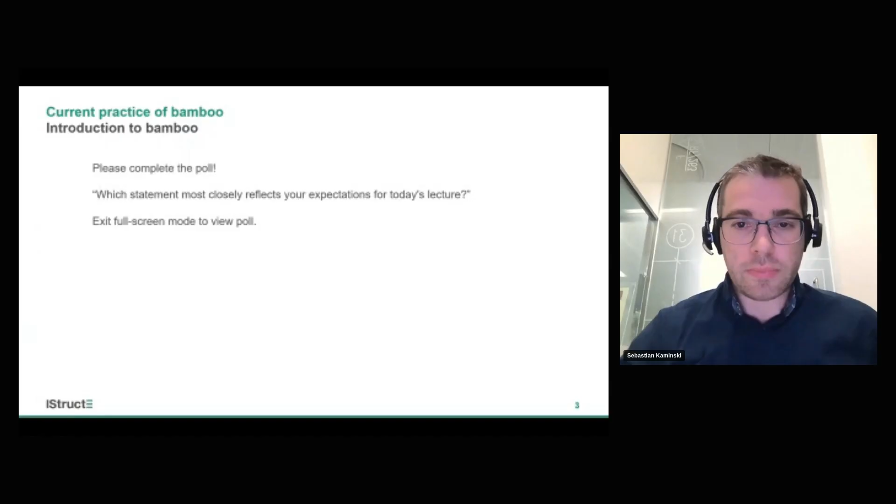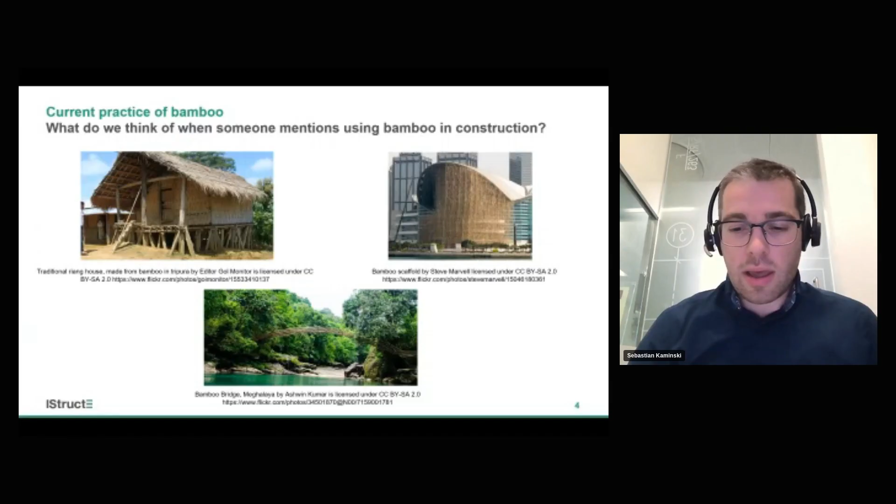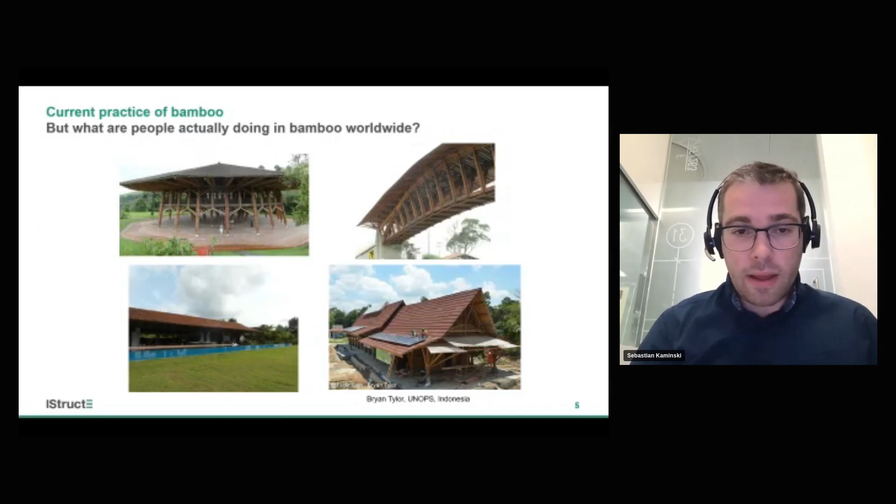So moving on, what do we think of when someone mentions using bamboo for construction? We probably think of something like affordable housing, maybe scaffolding, maybe an informal bridge, but generally we'll think of something that's quite low cost, quite temporary. But actually, what can we do with bamboo? Well, bamboo in the round, we can do quite a lot. There's been a lot of experience over the past, especially I'd say 25 to 30 years, a bit of a boom in using bamboo in the round, which is its unprocessed form, for a variety of different buildings. This is just an example of the sort of building you can build with large diameter bamboo. We've got pavilions which are 2-3 stories high, pedestrian bridges, community centers, luxury housing, and also affordable housing, which I'll talk about in a bit. So there's quite a lot of potential for bamboo in the round in construction.

So I'm going to give a quick introduction to using bamboo. If you are more interested in finding out about bamboo, state of the art, and how to design with bamboo, David and I do an Institution of Structural Engineers course which we run every year, so you're welcome to sign up to that. Bamboo itself is actually a giant grass, it's not a tree.

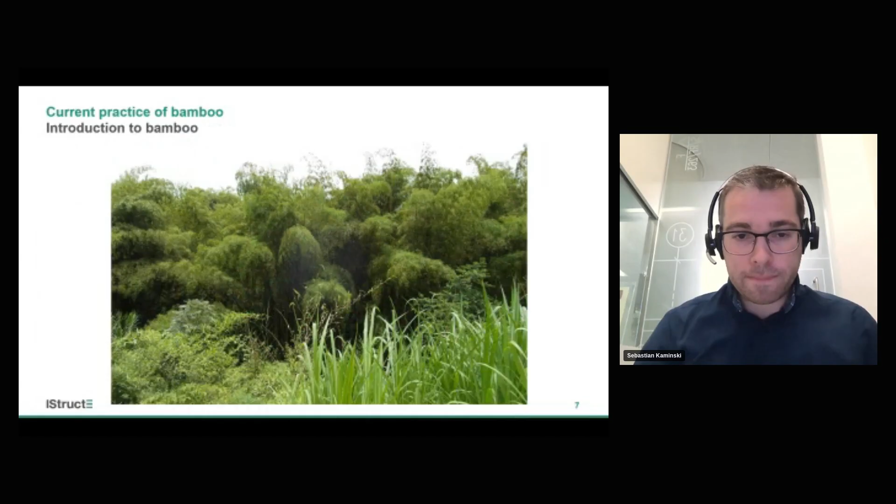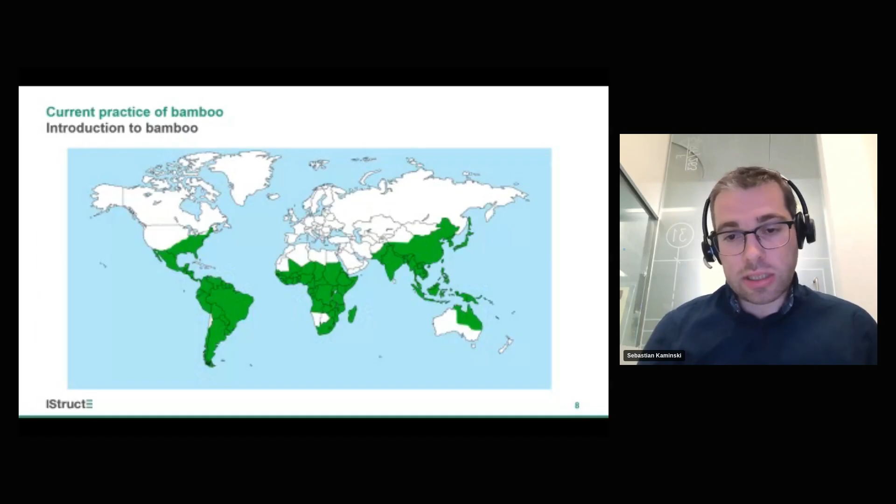This is a bamboo forest in Colombia. This is roughly where bamboo grows natively - most of South America, Central America, and the southern part of North America, a large portion of Africa, and South and Southeast Asia, extending all the way to Australia. So it grows natively in a large portion of the world.

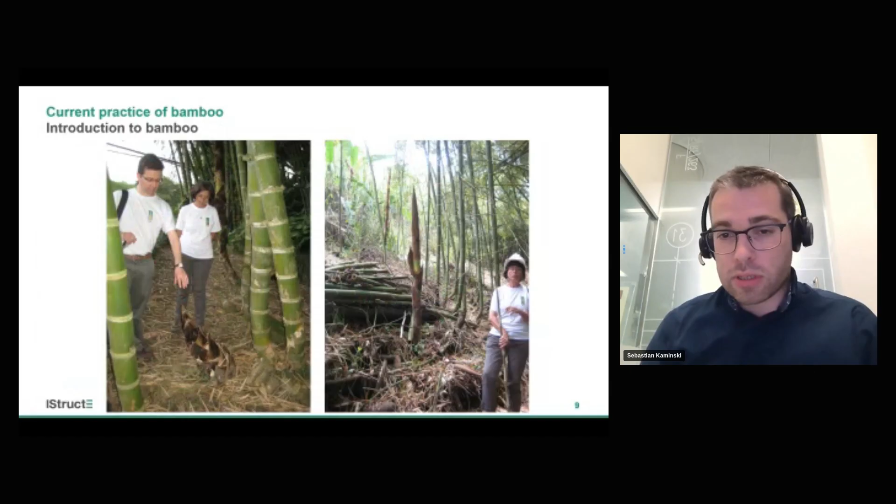Bamboo doesn't change diameter over its life. When it leaves the ground, that's its final diameter, and it goes through cell division between the nodes. On the left-hand side you can see David pointing at a culm just leaving the ground, and it grows very, very fast - within about 4 to 6 weeks that's what you can see on the right-hand side. It grows incredibly fast; within about 6 months it's full height, and then it starts to create branches, and it's mature after around 3 years, and after around 5 years it starts to degrade. So the window to harvest is between 3 to 5 years, and you can compare that with timber, where timber typically needs at least 40, 50, 60 years before it's able to be harvested. So bamboo grows incredibly fast, and from that point of view it's a very sustainable material.

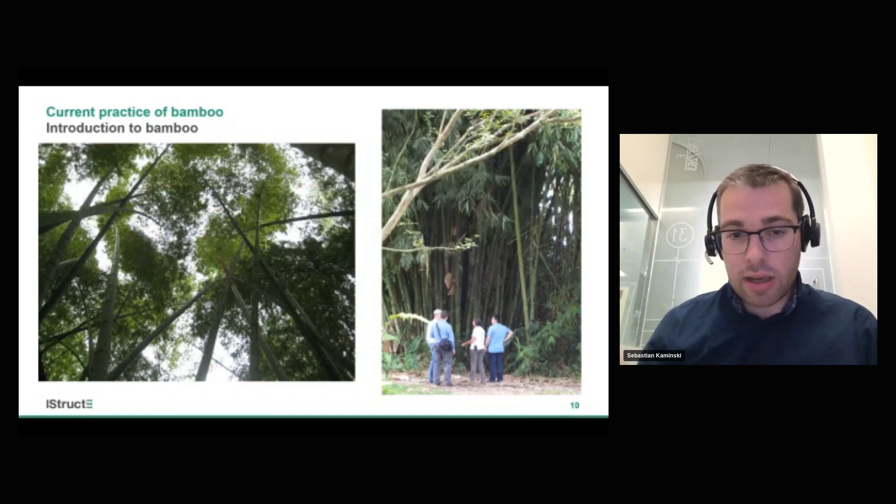A single stalk of bamboo is called a culm, and when they grow together, that's called a clump. So you might hear us referring to those two terms.

There are lots of different types of bamboo. They range in diameter from 10 millimeters all the way up to 200 millimeters. Some species are actually solid, but the majority are hollow. On the right-hand side, you can see bamboo there.

Bamboo has nodal diaphragms, which you can see in the image as this line across the culm, and that's a solid portion of fiber. In between that, it's typically hollow. So you've got the nodal diaphragm and the internode, which is the space between those nodal diaphragms.

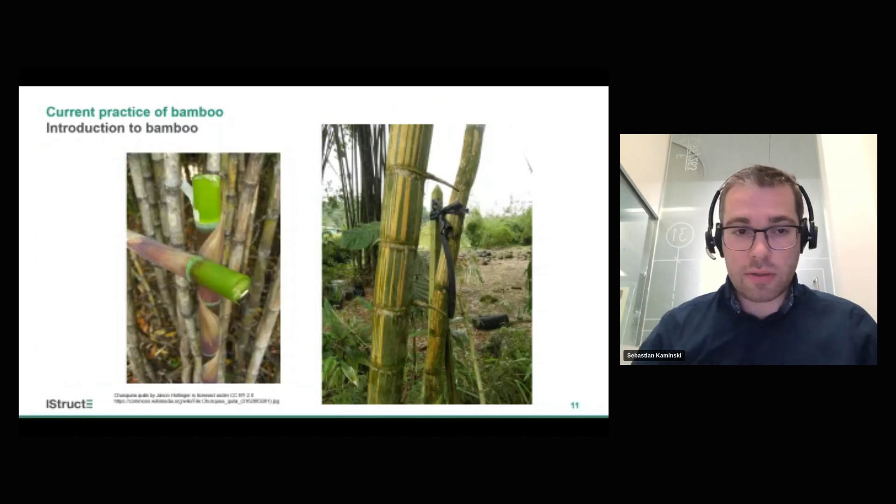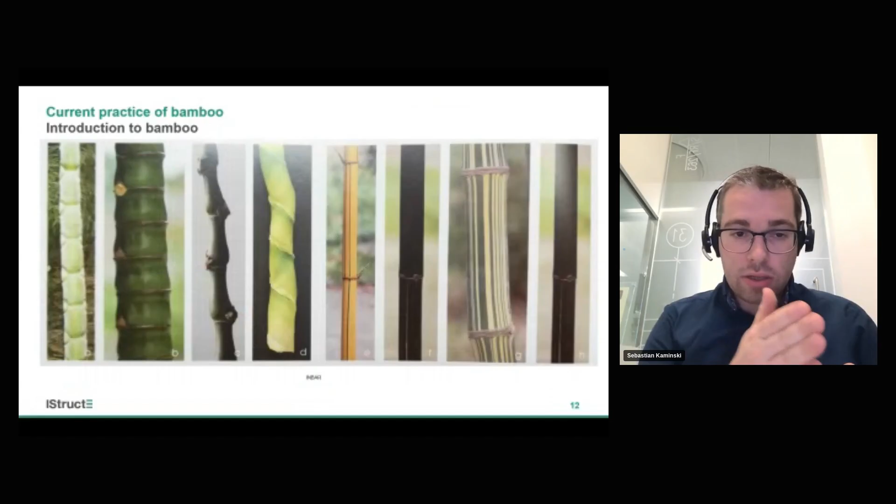There are over 1,600 different species of bamboo and counting. We're still discovering new species every year, and they range in color and shape. Some are straighter than others, some have nodes a lot closer together. But there are typically only about 10 to 15 species that we use structurally for construction because they're large diameter and tend to be straighter, so they're a little bit easier to use.

A brief summary of bamboo properties: the dry density is around 650 to 700 kilograms per meter cubed on average. Culm heights can vary from 3 meters up to 30 or sometimes 50 meters. Nodal spacing between the diaphragms is anywhere from 200 mil to 500 mil, and the diameter can be as small as 20 mil up to 200. As a general rule, the wall thickness for the solid species of bamboo is 10% of the external diameter.

Why do we consider bamboo very sustainable and low carbon? Firstly, it grows very fast to maturity, which makes it particularly useful if we're trying to fight climate change now. If we plant something today, we can harvest it in a very short time period.

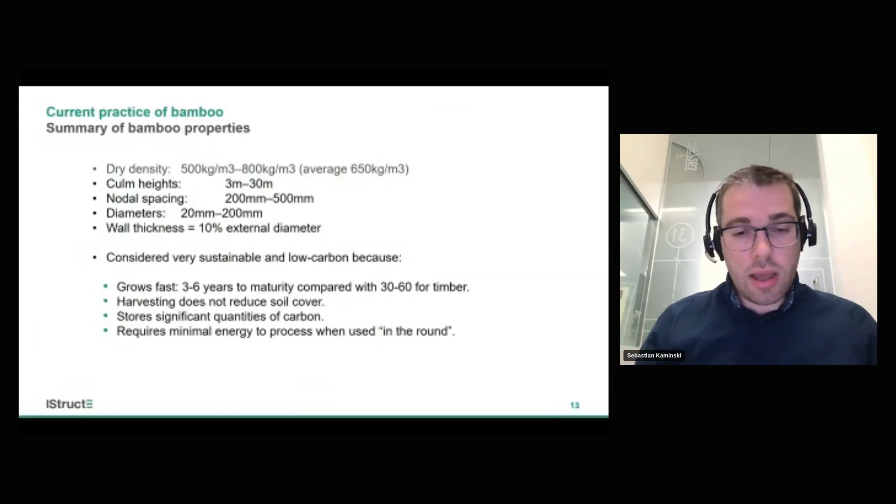Unfortunately, compared with a timber forest, if we plant one now, it'll take a lot longer to harvest. In addition, because bamboo is a grass, harvesting it doesn't kill the plant. Unlike a tree, where harvesting a single tree kills the plant, bamboo's plant survives underground and keeps producing new culms. Therefore, the soil cover isn't completely reduced and you don't get that erosion.

Bamboo stores significant quantities of carbon in the culm itself, but also in the plant underneath the ground. And it requires minimum energy to process when used in the round. So there are a lot of advantages of bamboo from that perspective.

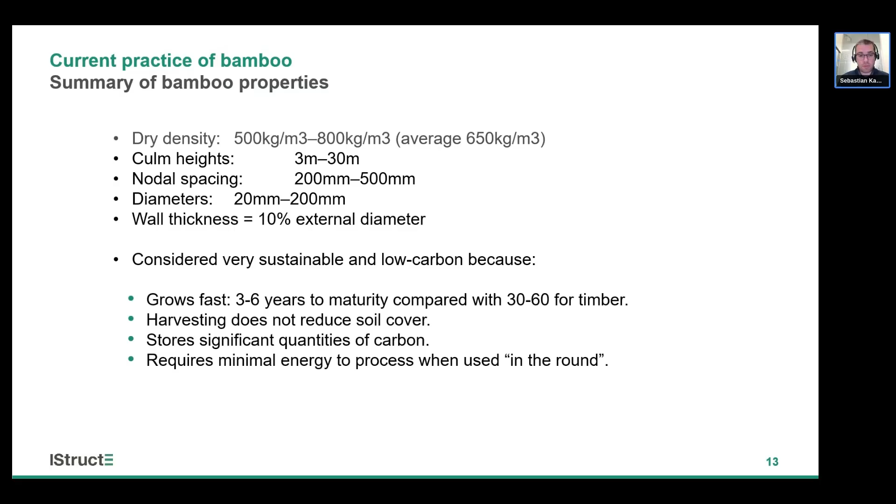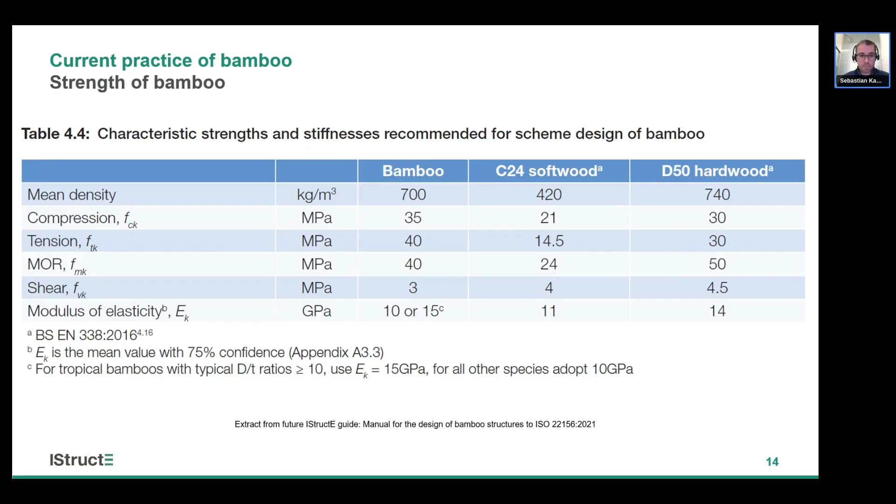It's cooked probably only for a few minutes, but most of that wall is completely gone, unfortunately. So you really have to protect bamboo from fire with gypsum plasterboard, gypsum plaster, or cement-based plaster. We've done tests showing that a cement-based or gypsum-based plasterboard can quite quickly give at least a 30-minute fire rating. But unfortunately, you can't use bamboo completely exposed to fire without any protection.

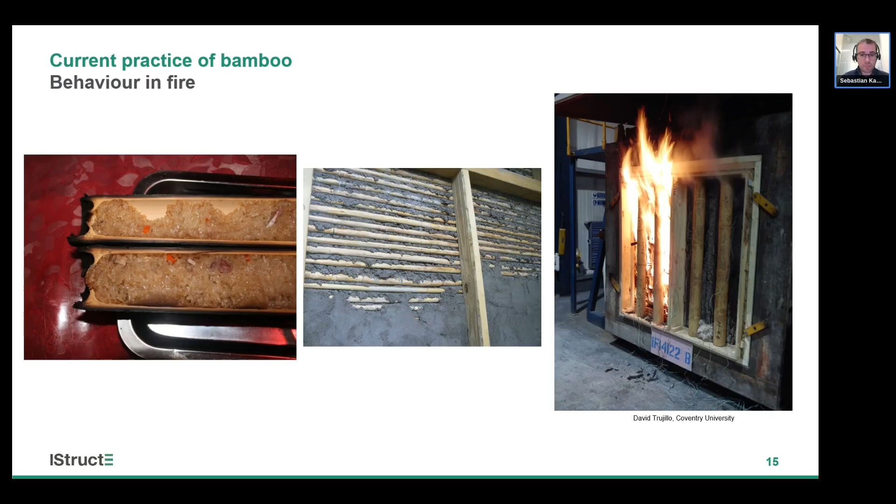Behavior in earthquakes. People often say bamboo is flexible and therefore behaves well in earthquakes, and that's a bit of a misconception. Bamboo itself, if you try and bend it, it will snap. So bamboo itself is generally quite brittle in most failure modes.

If you take a piece of steel on the other hand, and you bend it, most types of steel will tend to be quite ductile. You can bend it backwards and forwards several times. The steel heats up, and you've converted the dynamic energy into heat, but you've got a lot of ductility.

And bamboo buildings - so bamboo by itself as a material is generally quite brittle. Now, bamboo buildings can behave well in earthquakes, especially traditional ones. Firstly, primarily because they're quite light in general. And obviously in an earthquake, the force you need to resist is directly proportional to the mass of a building. So lighter building means less mass. In addition, we have those connections which can absorb some energy if they're well designed, and traditional buildings are generally quite well tied together.

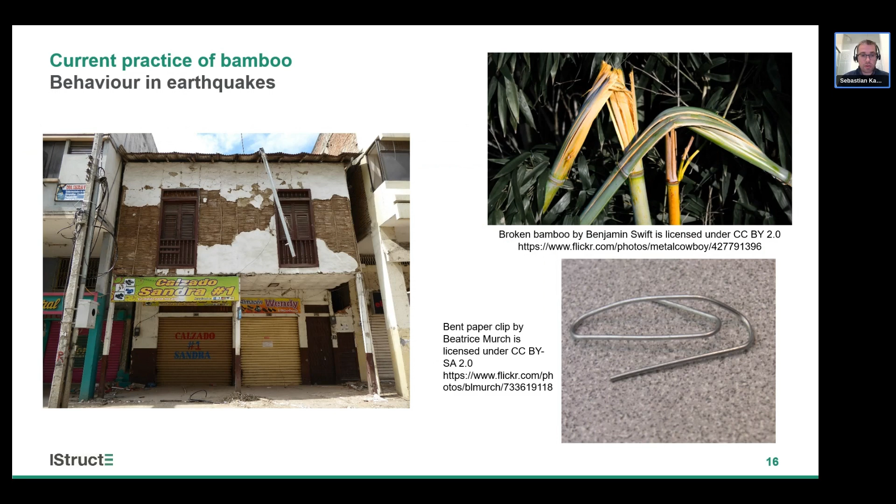Now, modern buildings - again, this idea of flexibility of bamboo is a bit of a misconception. We really need to have good steel connections to be able to absorb energy, exactly as you would approach timber in seismic design. So timber itself, generally most failure modes are also brittle, but it's those steel connections that can absorb energy. So exactly like timber when you're looking at bamboo for seismic design.

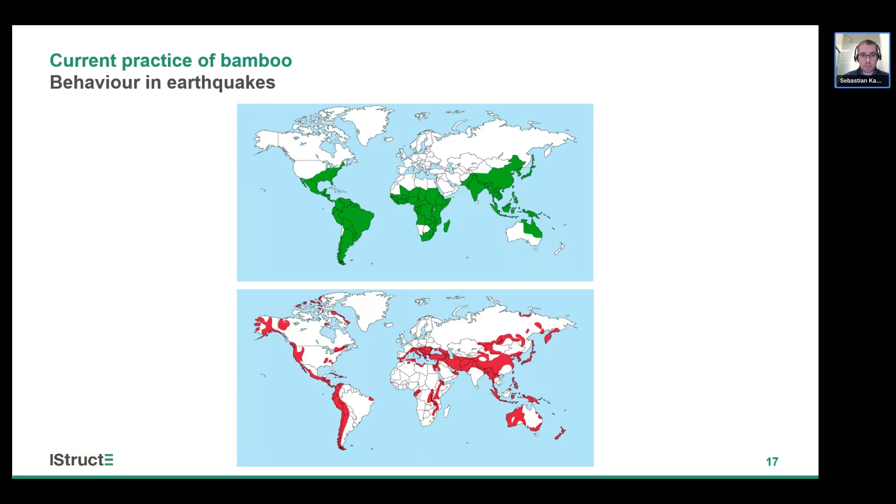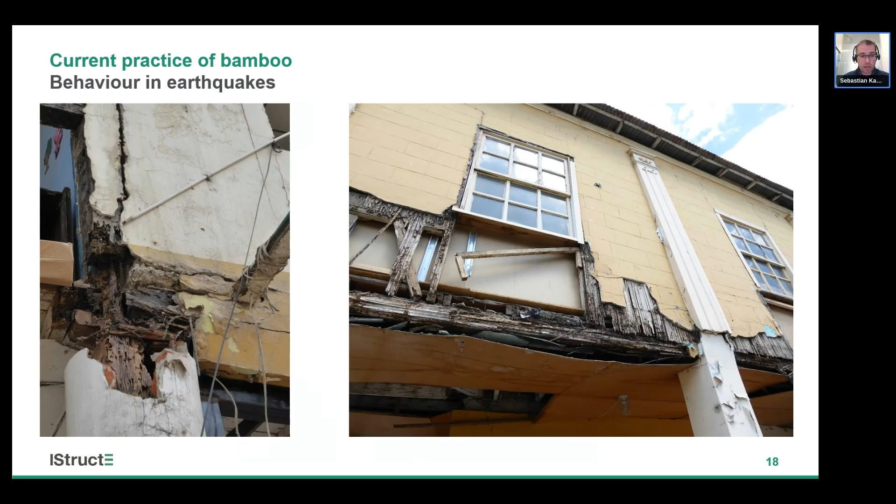But you need to keep bamboo in good condition. When bamboo isn't in good condition, the structure will not behave well in earthquakes, and we've seen this a lot after many recent earthquakes. These are just two photos I took after the Ecuador 2016 earthquake. This structure nearly fell down. Luckily it didn't, but most of the damage was actually due to rot, and that made it a lot weaker in the earthquake.

In wind, bamboo is quite a light material, and in general it forms light structures, and that means for winds it's a bit harder to design for, but it is possible. Base Bahay have done a great job in the Philippines making typhoon-resistant housing that's made of bamboo. The structure is predominantly bamboo, and they just have good connections, and they've tied the structure down to the foundation. So in the same way as you design any other building for typhoons, it is possible to make a modern bamboo building typhoon resistant.

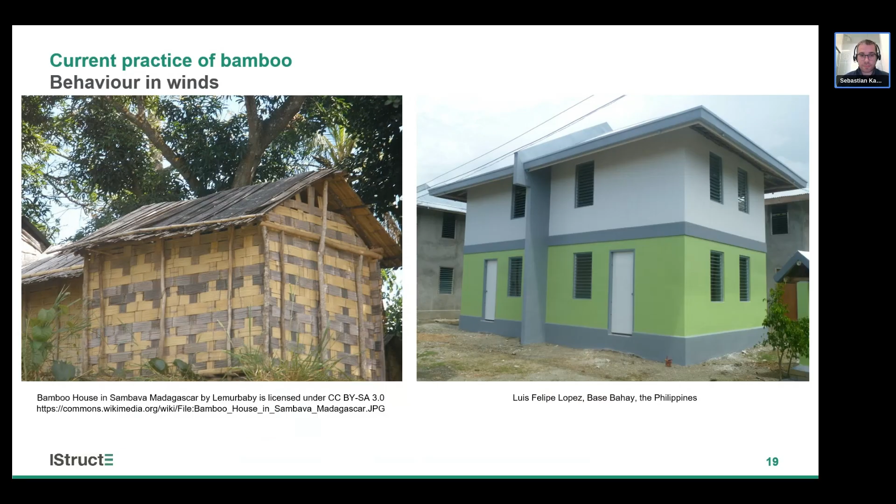In terms of durability, unlike some species of timber, bamboo does not have any naturally occurring chemicals which will help protect against natural attack mechanisms. So unfortunately, it's very vulnerable to beetles, termites, and rot. So for that reason, we have to protect it.

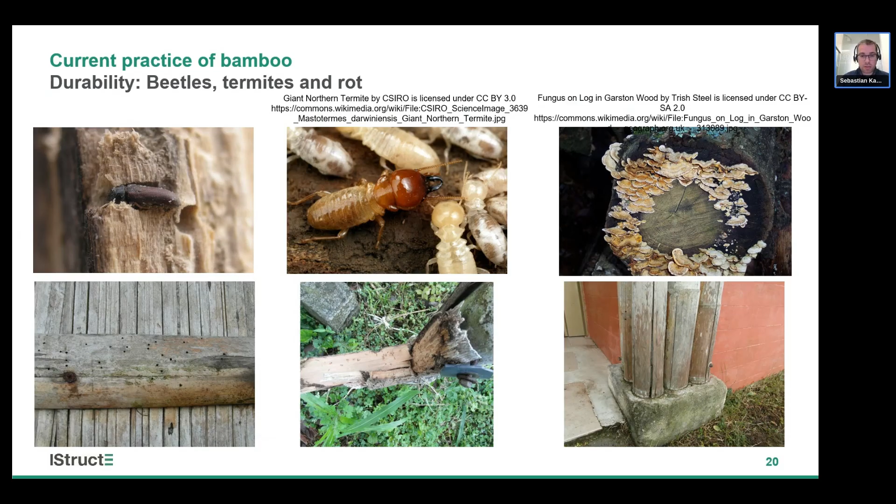And how do we do that? Firstly, we treat bamboo typically with boron, and that protects against beetles and termites very well. Unfortunately, you can't use boron treated bamboo outside because the boron just gets washed away. So we need to also keep it dry. How do we do that? Simple durability by design: you have a good waterproof roof, waterproof walls, you elevate the structure, damp-proof membrane. If you've done that and you've treated the bamboo, the structure should last 50 years plus very easily.

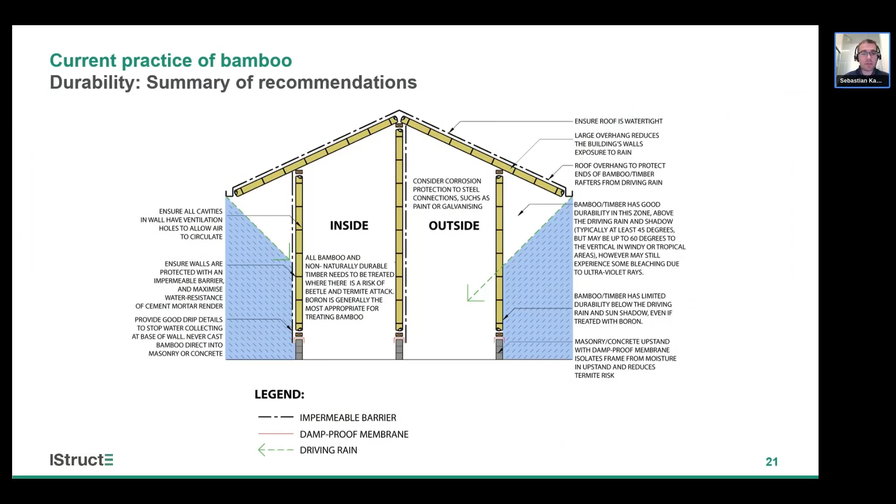So we know how to make durable bamboo buildings right now. This is a summary of standards around the world that use bamboo. The first one was in 2000, but the first detailed standard that contained a lot of design methods was in 2010, and that was published in Colombia.

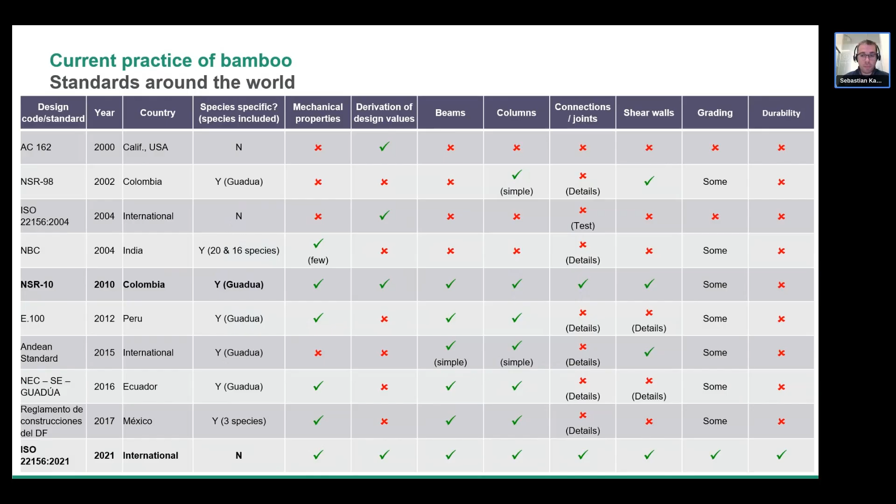And the most recent one in 2021, which David and I worked on, is ISO 22156, and this remains the state of the art. It contains the most recent design guidance and includes everything you need to do good structural design of bamboo in the round right now. So if you want to design with bamboo today, these are the three standards we recommend using: 22156 for structural design, 22157 for determination of physical and mechanical properties, and 19624 for grading. There's still a lot of work that needs to be done in this space, but this is a good start - at least one can do quite challenging structures now following these codes.

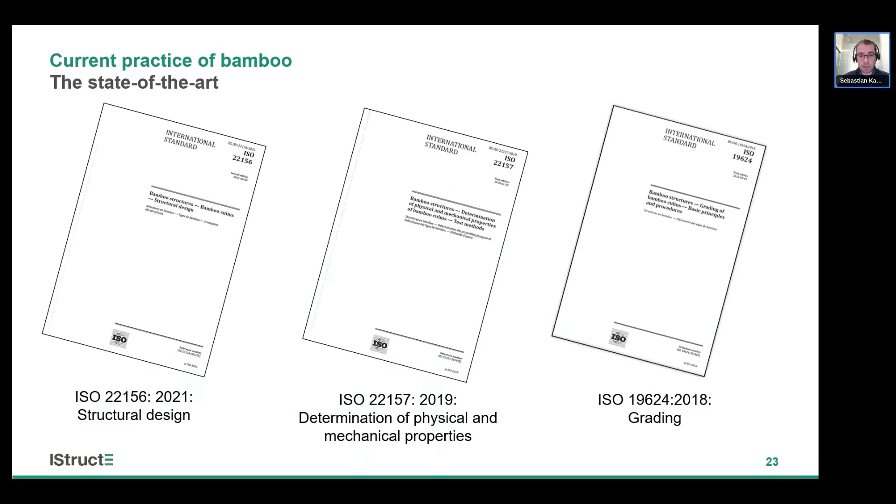Where in a structure is whole-culm bamboo most appropriate? Bamboo itself is quite strong, but the connections are the weak point, where you get crushing or splitting. Because of that, it's best to use bamboo for elements in compression, where connections are simplest, and since bamboo isn't very stiff, it's best used in bending with low dead and live loads, where deflection is less important. That makes it most appropriate for roofs, purlins and rafters, columns, and secondary beams and floor joists. Bamboo should be fully protected from water, sun, and rain, so it should only be used internally or externally when well protected by adequate roof overhangs.

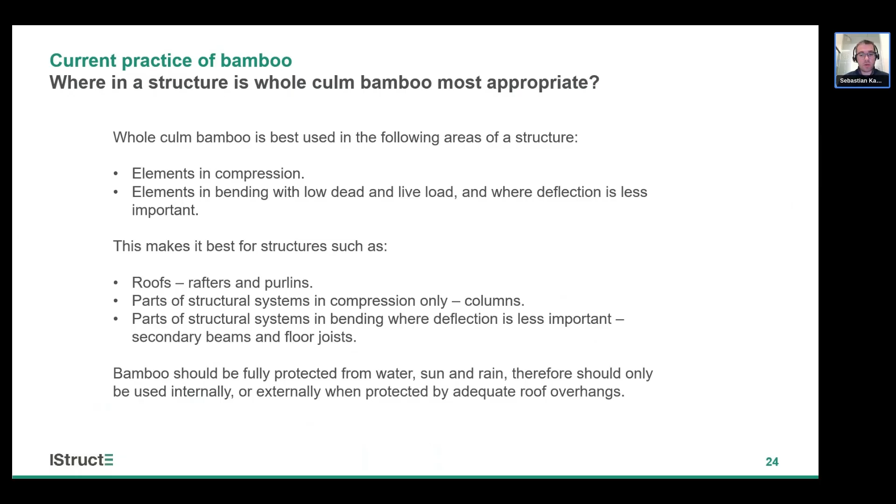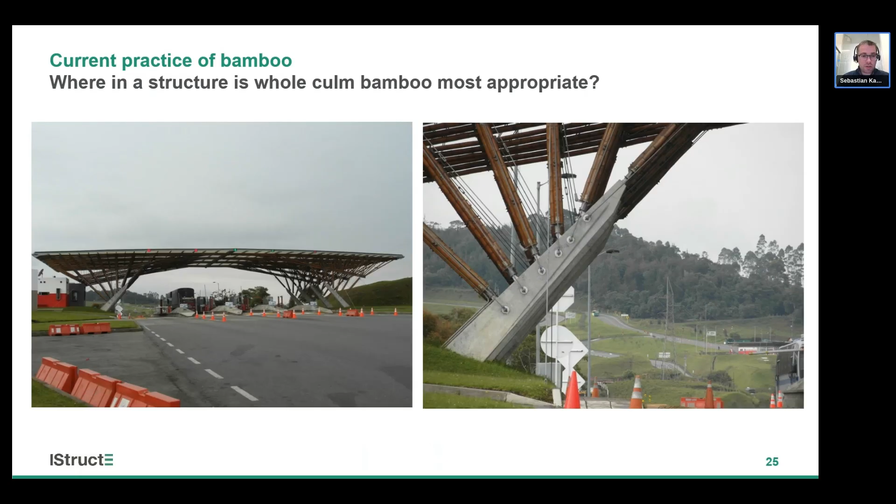This is one of my favorite images. This is a toll booth in Colombia. The designer has used bamboo in a very clever way, mixing it intentionally with different materials. They used concrete for the foundation that touches the ground and is most exposed to driving rain, bamboo predominantly in compression, and steel cables for the areas in tension — intelligently using three different materials where they are strongest.

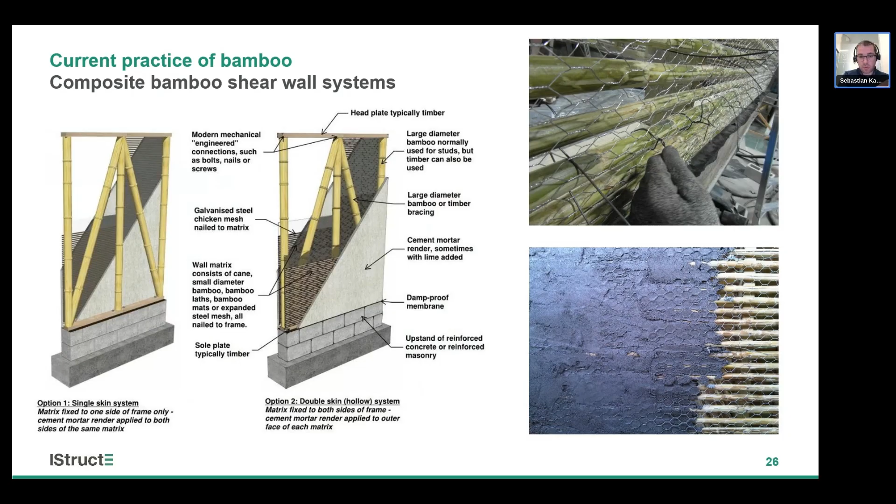In terms of systems, there's one specific system we think has a lot of potential: the composite bamboo shear wall system. This uses a timber or bamboo frame clad in a matrix of bamboo and plastered in cement mortar with chicken mesh reinforcement. That system has proven to be quite earthquake and wind resistant, and it's fully code compliant with a design life of 50 years plus. It's based on the vernacular wattle and daub system from Latin America called Bahareque, but improved using local engineering.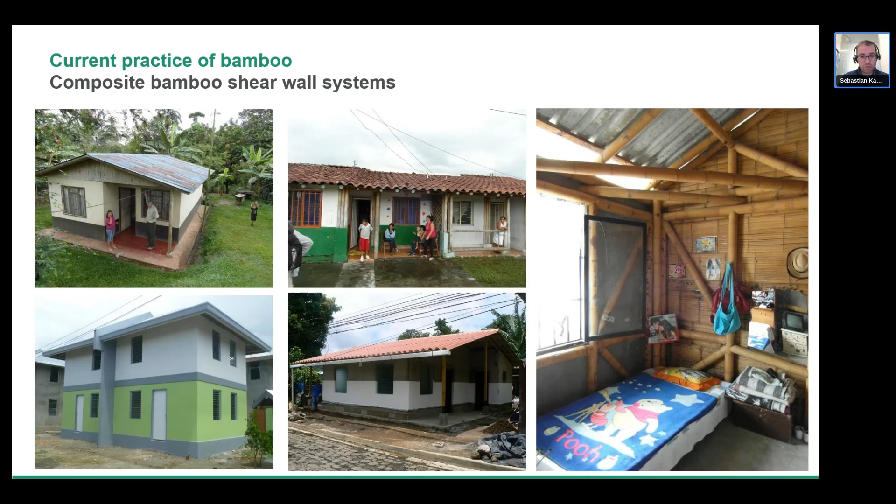These are some examples from around the world, anything from single story to two-story terraced housing in various countries. Over 10,000 modern composite bamboo shear wall houses have been built since 1980, most in Colombia, Costa Rica, India, Nepal, Philippines, and Ecuador, but also smaller numbers in El Salvador, Mexico, Haiti, and other countries. This system has a lot of potential, and if you're working in affordable housing, we'd encourage you to look at this.

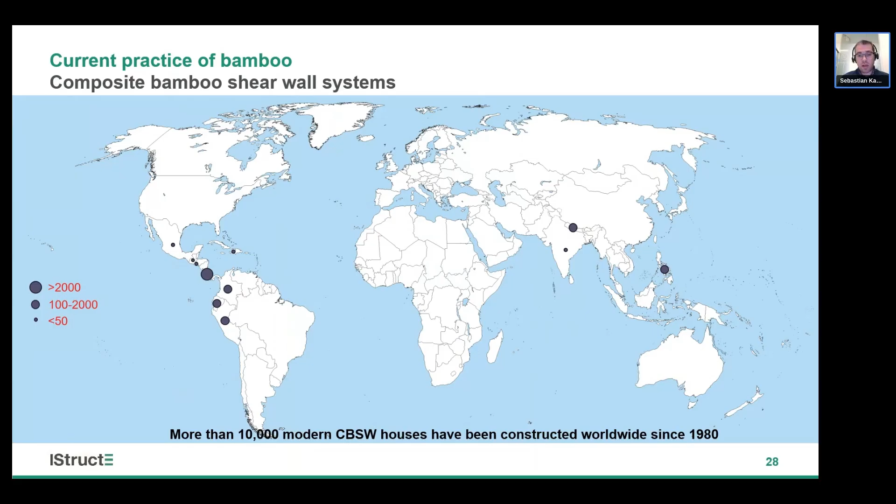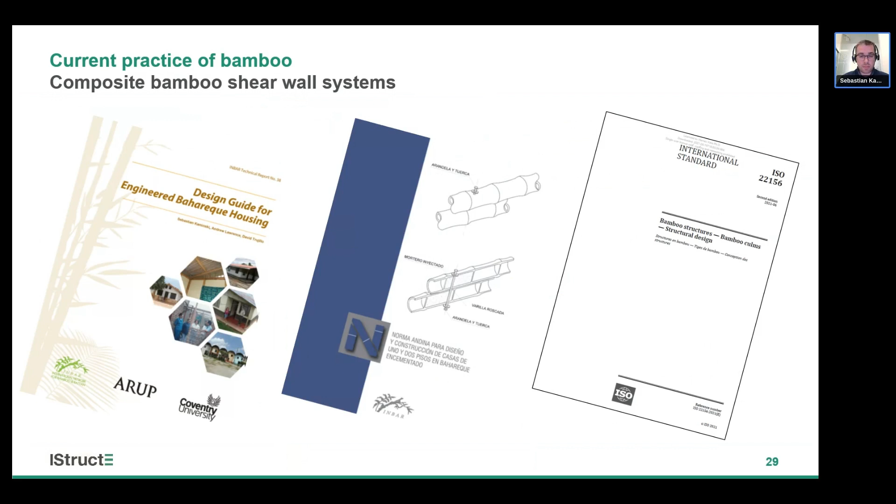We've published a number of design guides on this in English, Spanish, and French, and it's also incorporated into ISO 22156. Before I pass on to David, I wanted to finish off on the current level of knowledge on structural design of whole-culm bamboo. We can design with whole-culm bamboo right now, though it's still relatively in its infancy compared with timber.

For mechanical properties of various species, some, particularly moso, asper, and guadua, are quite well studied, whereas others are much less studied. In general there isn't an enormous variation between species — there's more variation in stiffness and strength, though it's not hugely significant — but we still need more work in that space. There's still enough to do good design; you just might need to do some testing for rarer species.

For element design, there are good design equations for flexure, shear, and compression already in existence. Joint design is another weak area — we've provided some methods in ISO 22156, but more testing is required. Unlike Eurocode, where you can pick up the framework and design from first principles, with bamboo you normally have to do full-scale testing to validate an unusual joint design, unless it's quite simple.

For durability, we know how to make durable bamboo buildings that can last 50 years plus. For fire, we know bamboo doesn't behave well, so it has to be protected. For seismic design of systems, this hasn't been studied much. We know the composite bamboo shear wall system has quite a lot of ductility — that's been studied the most — but very little full-scale testing has been done on moment frames or braced frames. We think they have some ductility, but it's probably limited, so that's another area that would benefit from more work.

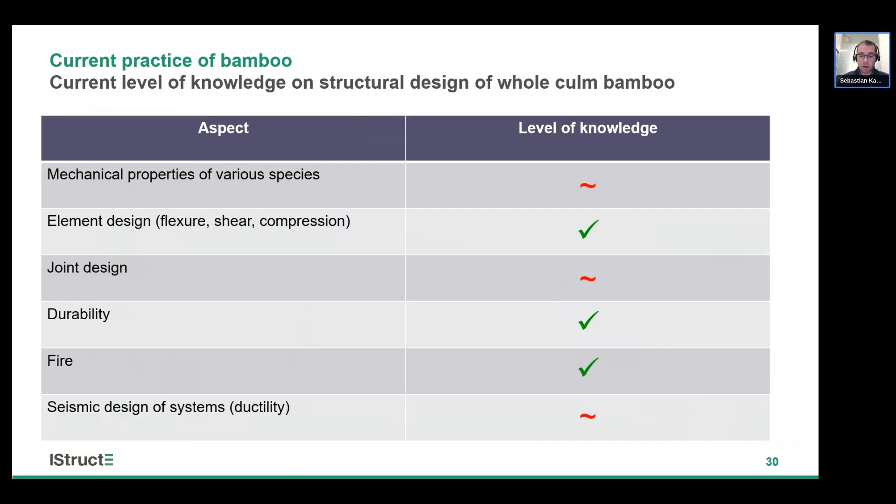Now I'd like to pass over to David, who will talk about bamboo's future prospects. I'm going to talk a bit about the prospects of what we could do with bamboo. So firstly, let's talk about the barriers to adoption of bamboo in its round shape and poles, culms.

First, there's a barrier of acceptance. There's a perception of low status in some communities - it's sometimes called poor man's timber. Legislation is another issue; it's not recognized in the national building codes throughout the world. There are concerns about performance, which may be real or perceived. And of course, there's the issue of fear of the unknown.

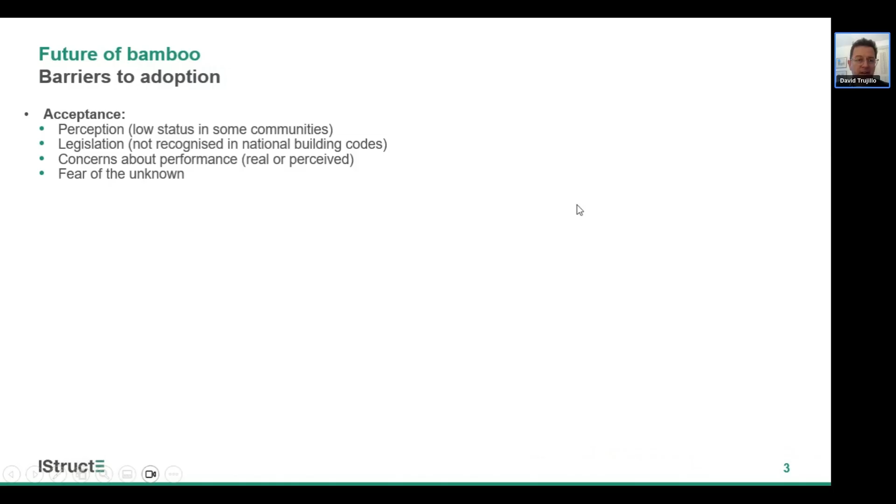There are some real inherent limitations. Sebastian's already mentioned the poor fire resistance, mainly caused because it's hollow. It's got limited durability because it's hollow, and it has no naturally occurring chemicals protecting it.

An interesting one is that bamboo is generally cheap because it's fast growing and simple to process, but if you're going to transport it very far, transportation costs start racking up, precisely because of the hollow shape - it's not a very efficient shape to carry around.

It's also very susceptible to cracking, due to its anisotropy and hollow shape. It has irregular shapes and sizes - it's natural, circular, tapered, segmented, which makes it difficult to connect. And many of these processes are quite labor intensive.

Supply chains are complex because in some parts of the world, you don't find established suppliers that can provide reliable quality bamboo. There are also lack of incentives - currently no real requirement for low carbon construction. So why would you go through all the difficulties we've mentioned when you can continue using carbon intensive materials?

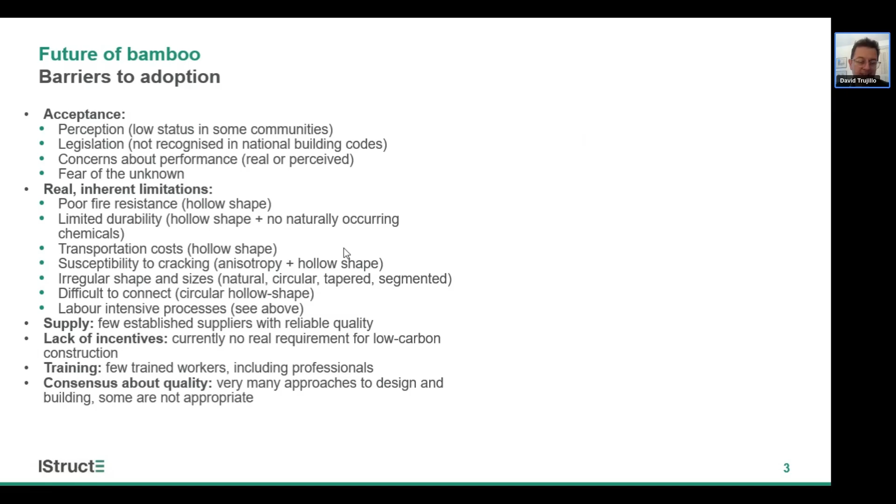And training - there are few trained workers, including professionals. And there's consensus we're still lacking - consensus about what constitutes quality construction. There are very many approaches to design and building, and some of these are not appropriate.

So how can we address some of these barriers? The first one is working through ISO standards, which is what Sebastian and I have been working on. Also working on national building codes - work that I've been doing in other countries.

How can we address the fear of the unknown? At least, as Sebastian has mentioned, through the IStructE manual, we help create familiarity and allow professionals to find a reliable source to answer their questions. How can we address fire? Sebastian's mentioned encapsulation, but there could also be other design considerations.

Limited durability, as Sebastian mentioned, is addressed through preservation and protection by design. Susceptibility to cracking is strongly addressed if you work with seasoned bamboo, but also through some design considerations.

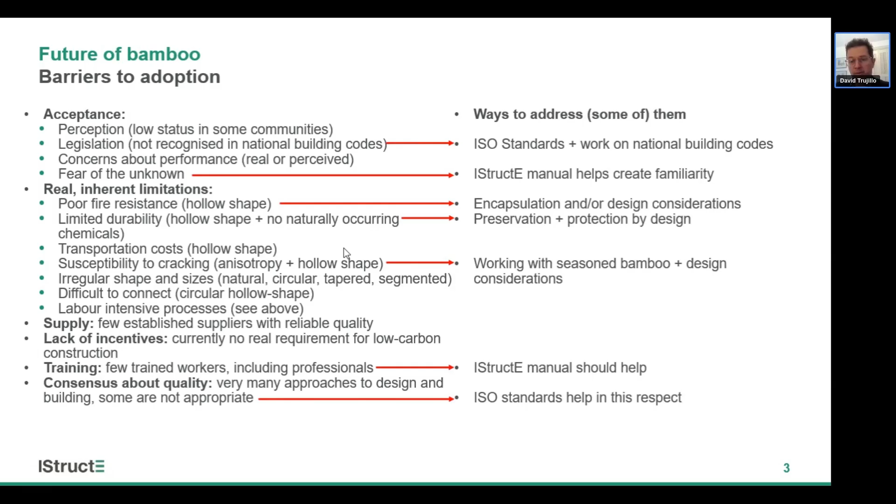In terms of training, we have few trained workers, including professionals, but hopefully the IStructE manual is a way to move in that direction. And in terms of consensus on what constitutes good practice, hopefully the work we're doing around ISO helps in that way.

In terms of ISO, we have 3 published standards for bamboo culms, and we have 3 published standards for engineered bamboo products, which I'm going to tell you a bit about. There's more on stream for engineered bamboo coming along.

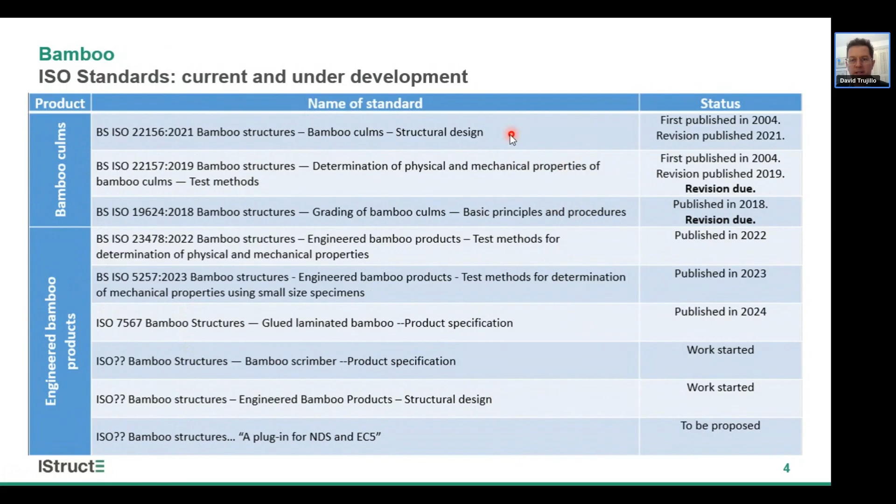So there is work - we are actually due to undertake revisions to these 3 standards. Two of these soon, and this one next year will be due for revision.

Talking of the IStructE manual, it is linked to ISO 22156, which is for design of bamboo culms. I'm just going to mention some things about it - it's got lots of guidance and solved examples, so hopefully it'll be a very useful resource.

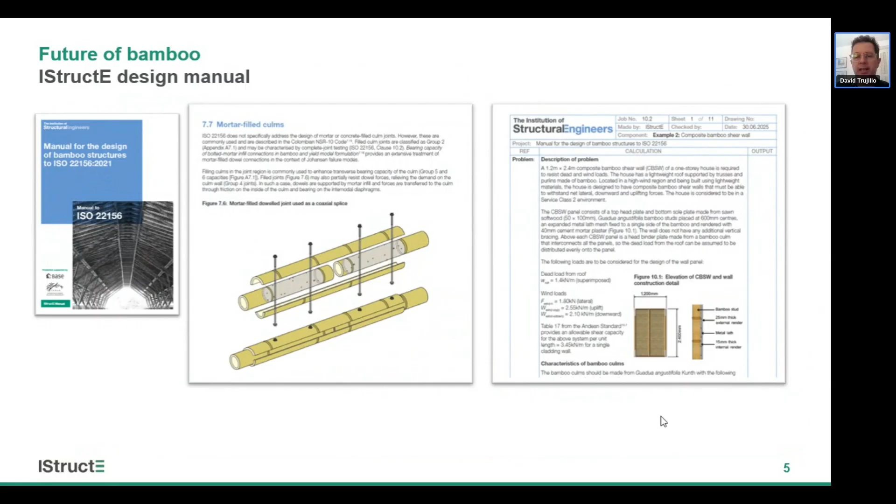It will be coming along hopefully by the end of 2025, and it will be free to download. If you're interested, at the end of my presentation there'll be a slide with a link for you to register your interest.

So I've mentioned the word engineered bamboo. There are two main engineered bamboo products at the moment. One of them is laminated bamboo, which is a bit like glulam, but made of little pieces of bamboo glued together, forming a board, and then these boards are glued together.

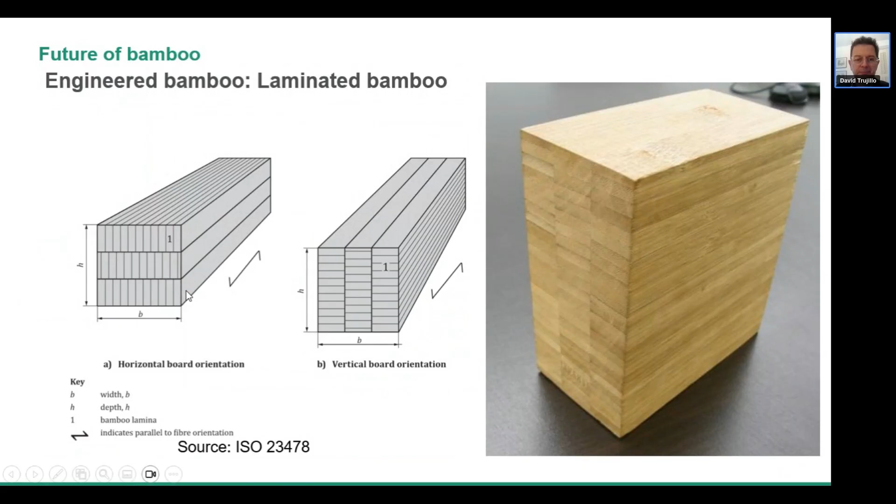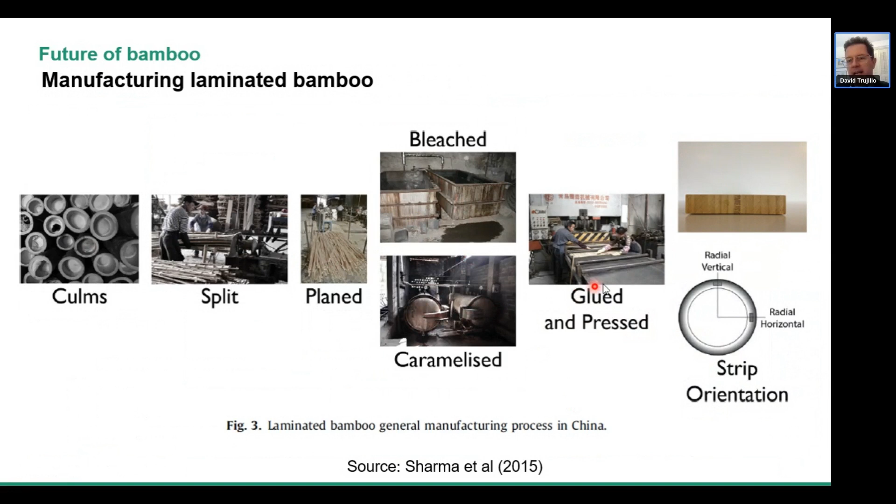The process is: you start with the culms, you split them, you plane them, you either bleach or caramelize them - this is how it's made in China. In other parts of the world, the process is slightly different. Then they're glued and pressed, and that's your final product.

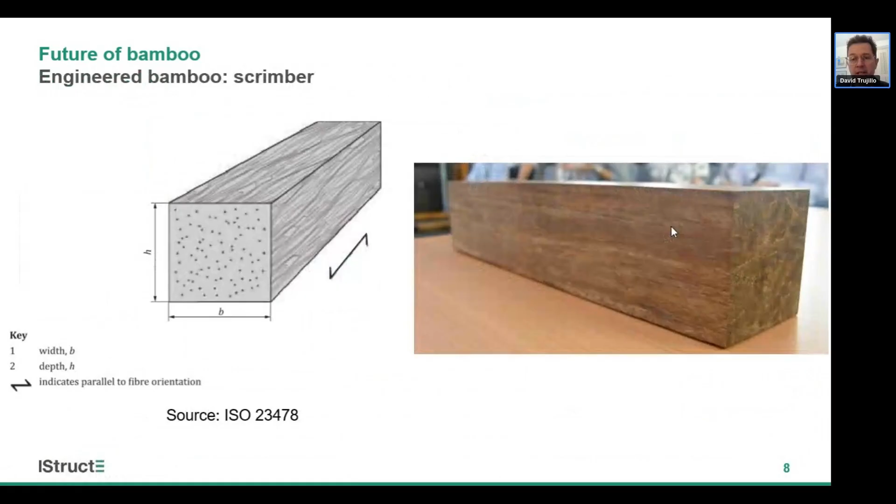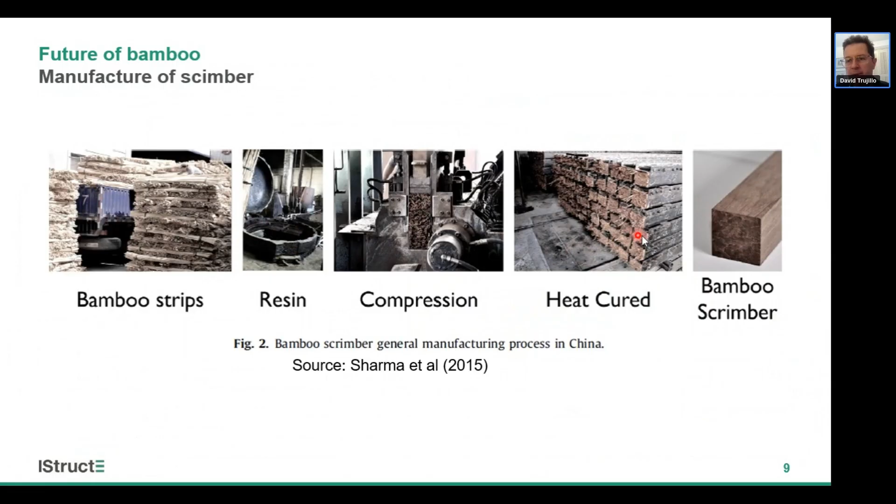The second main engineered bamboo product is scrimber - this is what it looks like. You start off with some strips which are covered with a resin, then they're subjected to compression force and heat, potentially, and cured, producing the final product.

One of the things that changes between engineered bamboo and bamboo culms is that now, because you have a larger section, you can have a section with very reliable and significant fire resistance.

Research shows that laminated bamboo performs slightly worse than softwood, and scrimber performs slightly better than hardwood. So overall, you can say it behaves in a similar way to timber in a fire, and you can adopt its design procedures.

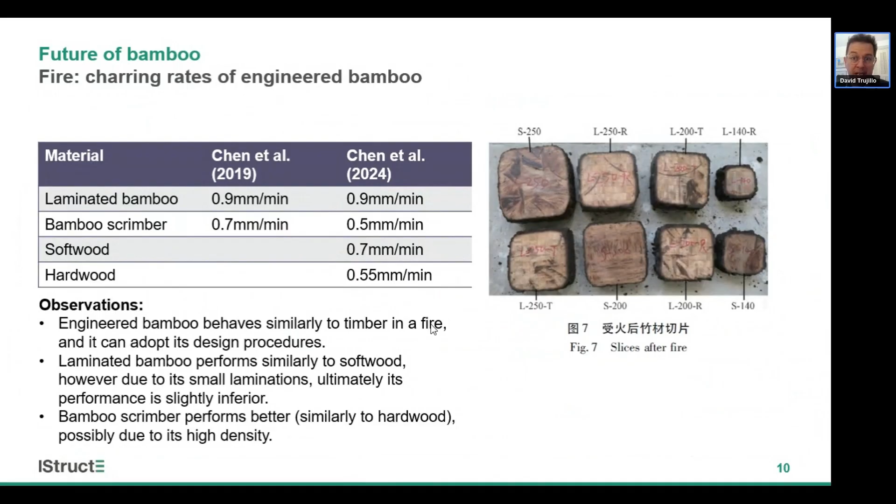And so that's a game changer with respect to bamboo culms. They also have a significant change in reaction to fire.

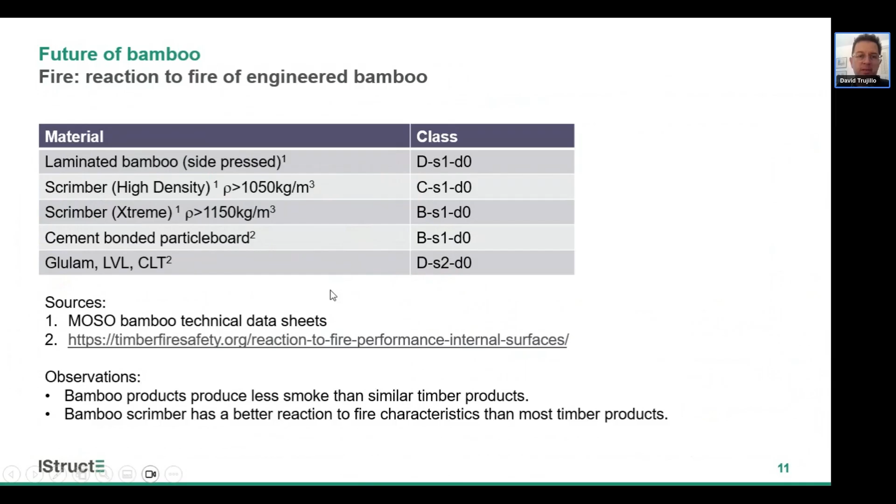In terms of connections, it looks very much like timber, so you would have thought that it can be connected like timber, which is true to an extent. There are some failure modes which are slightly different, but fundamentally what's been demonstrated is that you can design it in a similar way to engineered timber. You can make connections that look like those in timber, so we don't have the issues you have with bamboo in the round, where the connections are peculiar.

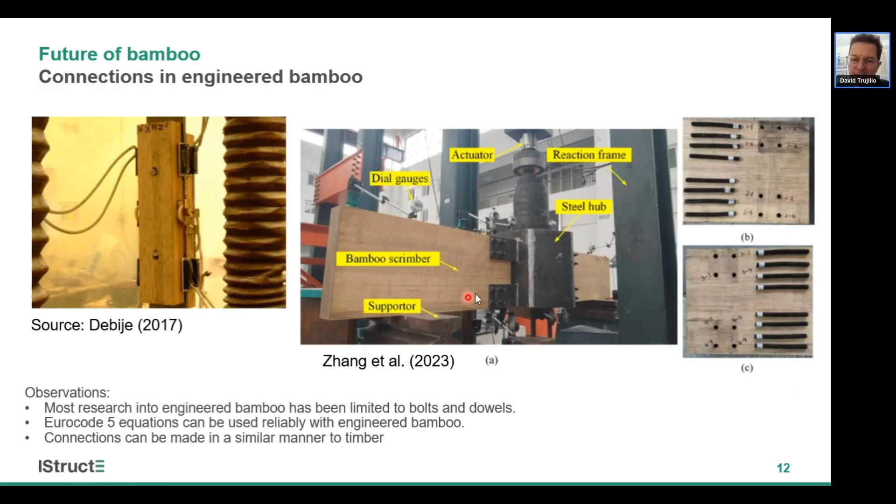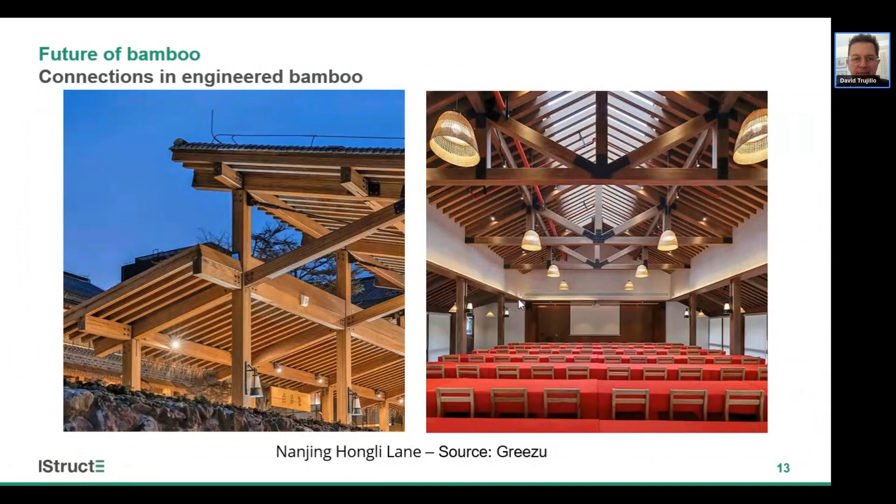So far, most of the research has focused on bolts and not yet on screws or nails. But then you can make things that look like they're made of timber. Here's some photographs from a manufacturer in China, and you start to see this is very similar to what you can make with timber.

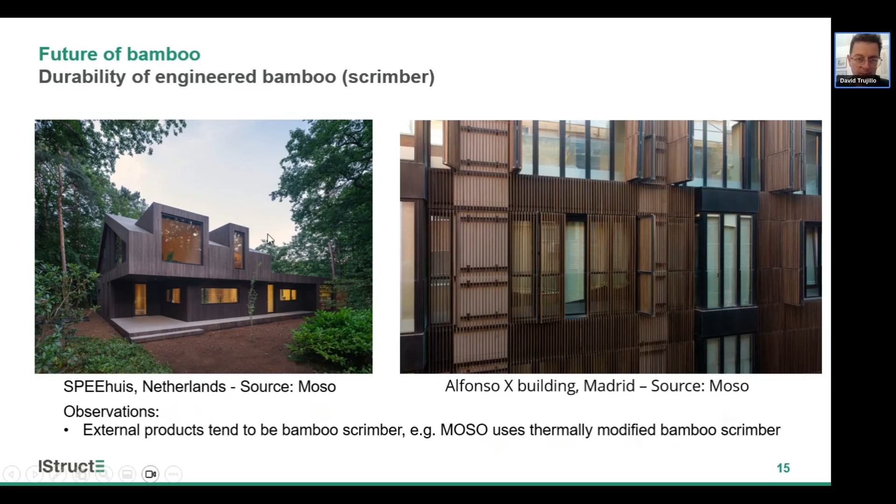In terms of the durability aspect, because scrimber has quite good durability, better than laminated bamboo, you can start using it in applications that you couldn't do with bamboo in the round or natural bamboo, such as cladding products. So there are products around the world that can be used with thermally modified bamboo scrimber. It's an interesting possibility.

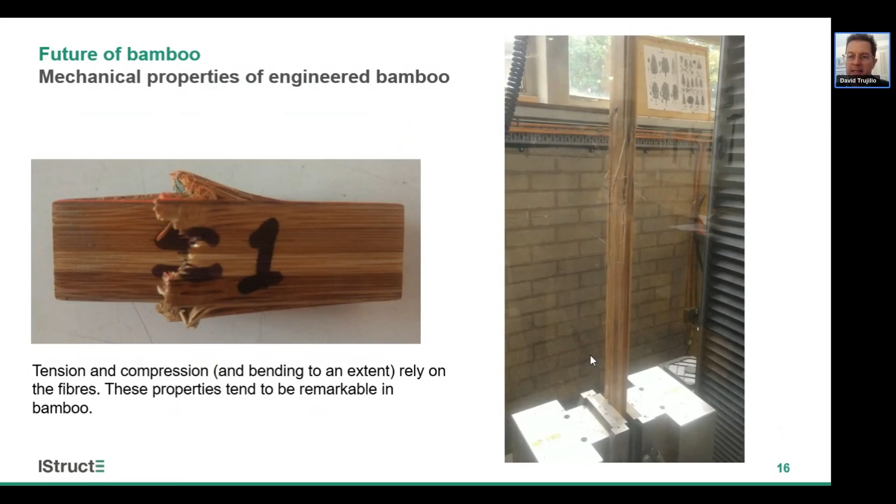In terms of mechanical properties, because tension, compression, and bending to an extent rely on the fibers, we have pretty good properties. Here I've got a video of testing bamboo in tension, laminated bamboo. You can see it's remarkably strong.

But the one thing we know is very important in the design of timber, which tends to govern design, particularly of beams, is deflections, meaning it's governed by modulus of elasticity. These products do not have particularly remarkable modulus of elasticity. If anything, it looks very much like a softwood. So for the moment, though you have remarkable strength, you don't have particularly remarkable modulus of elasticity.

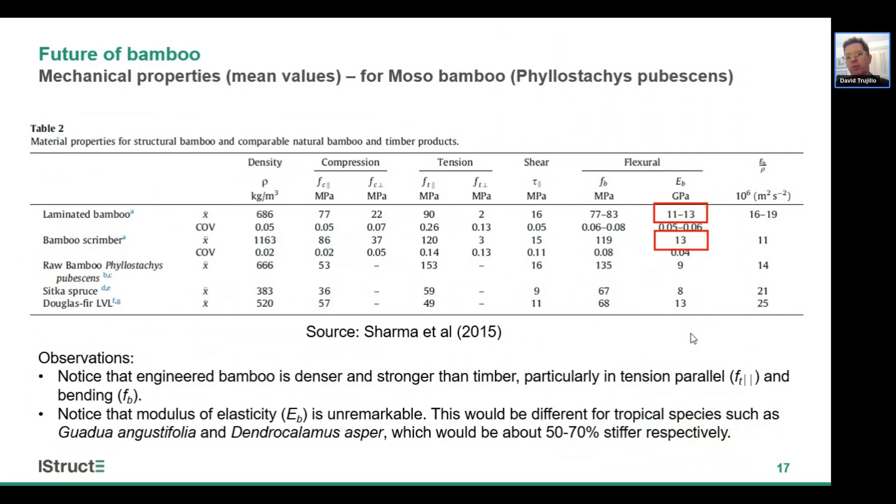We believe that if you use tropical species of bamboo, this could be changed - tropical species like this - and you can maybe get 50 to 70% stiffer sections. If this is demonstrated in industrially made products, then this could be a game changer, because then you're talking about a product that is 50 to 70% stiffer than softwood. Yes, it is more expensive, but it is also more capable. So we believe that's a really interesting aspect to look out for.

One of the problems for bamboo is developing the scale of production. As I mentioned, cost is a barrier for engineered bamboo. This is an idea I've had - I'm not going to say it's necessarily the path, but it does reflect what manufacturers have done. The reality is that engineered bamboo as a structural product is relatively expensive, but it could be in part because of economies of scale. So one of the things we can do with bamboo is help build that economy of scale by specifying engineered bamboo products.

But let's not start at the hardest part, which is engineered bamboo as a structural product. Let's start with the easy bit - non-structural applications like flooring, architraves, skirting, doors, etc., which have less stringent performance requirements. Then we gradually move towards semi-structural applications: decking, mullions, non-load-bearing partitions. Then secondary structural elements like rafters, floor joists, wall studs, and so forth. Then structures with easier building regulation compliance like roof structures and external structures. And finally we start looking at pilot applications.

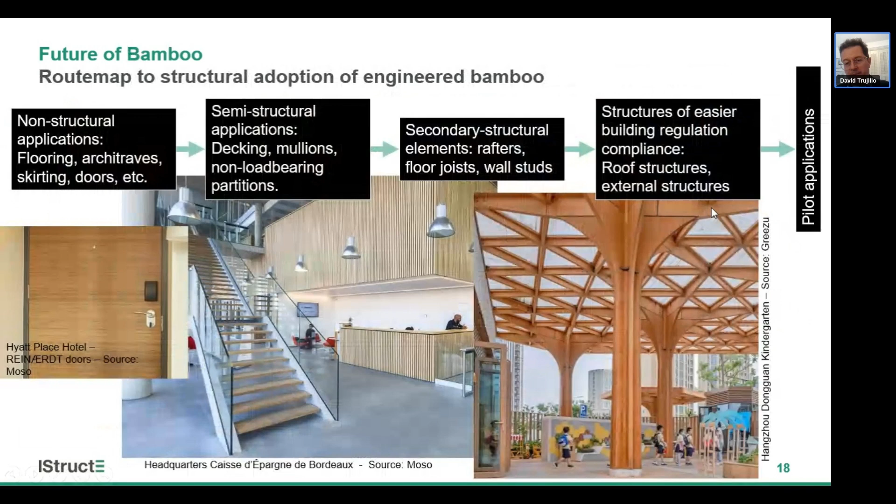So I think this is a journey that we can all be involved in. I know that only somewhere around here does it become relevant to structural engineers, but it is a worthwhile path - I'll elaborate on why in a moment. Sebastian's already covered its remarkable sustainability. Another thing that can help create the economies of scale that are needed is possibly developing products that sit somewhere between the bamboo culms and the full engineered product.

This is because the factories for engineered bamboo are expensive to set up, and so you need large capital investment. You have a chicken and egg situation where it's, well, how am I going to make this capital investment if I don't know if you're going to buy my product? So one of the things we've been exploring is alternatives.

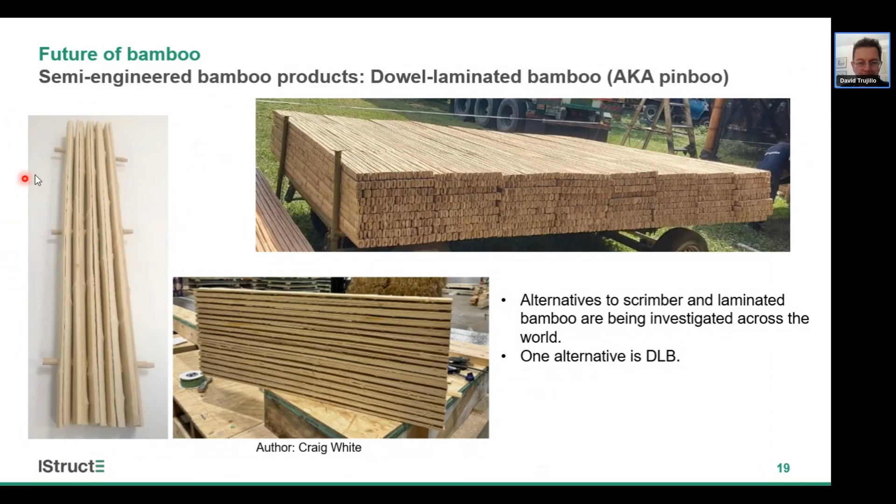One that I've been particularly interested in is something I've called dowel laminated bamboo. That's the term I prefer, but it's frequently known as pinboo, which consists of strips of bamboo that are doweled together. You can make quite a uniform product. It's remarkably stiff and strong.

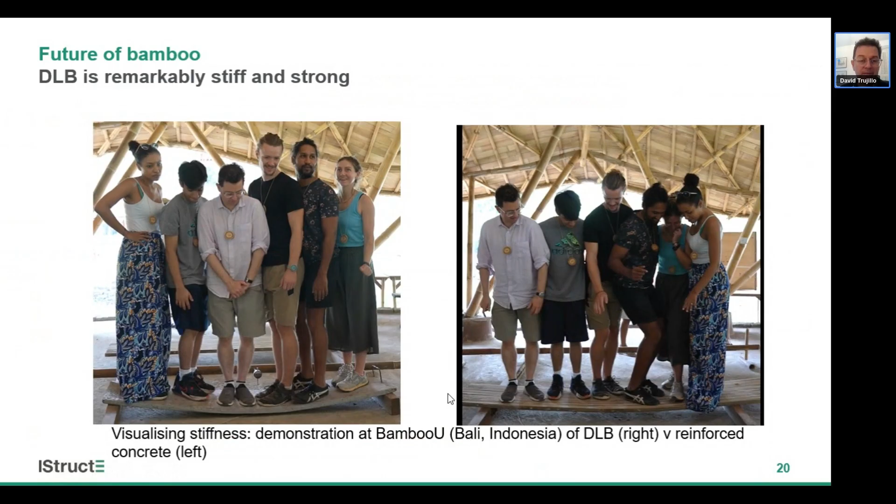Here I've got a couple of photographs of a demonstration that we did of a 40 mil reinforced concrete slab versus a 40 mil pinboo slab, if you like. You can see it's not just strong, but also stiffer with the same load. We did this in an activity at an event place called BambooU in Bali, and it was just trying to drive the message clearly of how it works.

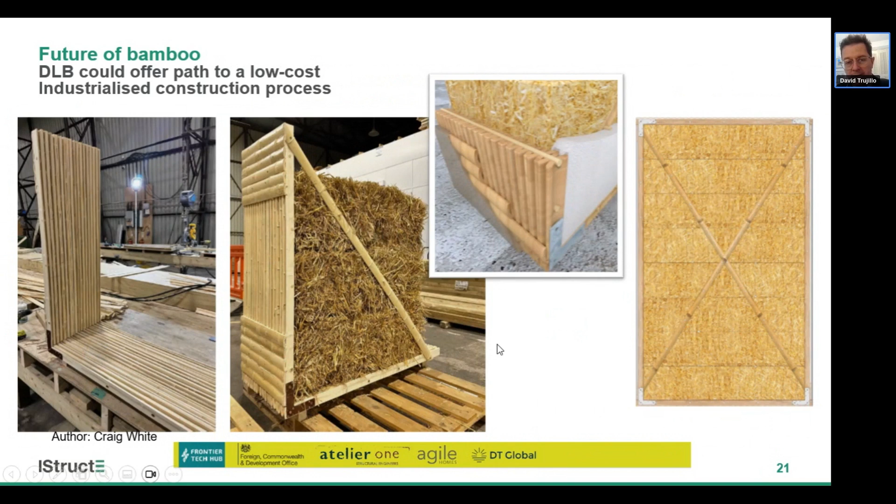Now, where to source engineered and semi-engineered bamboo products. Most engineered bamboo products at the moment are made in China. There are factories elsewhere in the world, but by far the largest production is in China.

There is a nascent industry, or business shall I say, more than an industry at the moment, of trying to plant bamboo throughout Europe, because there's demand for bamboo in Europe, and the idea is to bring it closer to Europe. So there are some plantations coming along. Possibly one of the most advanced so far are in Portugal, but there are other places throughout Europe.

One of the things worth noting is that sustainability goes beyond carbon and transport, because people always say to me, oh, but if we're going to ship engineered bamboo or semi-engineered bamboo products from far away, we'll have all this embodied carbon from the transport, which is true. But most of this would be shipping miles, which would be smaller than, say, the land miles.

But the other side to this story is the huge societal impact and potential environmental benefits of trying to grow a bamboo industry in the global south, which would foster a great deal of employment and opportunities there, and which in turn would help foster the growth of their own engineered bamboo industries, which need the capital investment we were talking about. So I think we need to consider, when we talk about engineered bamboo products in the future, that there is a story that's more complex than just the embodied carbon transportation. We also have a story to tell about the societal benefits of this industry.